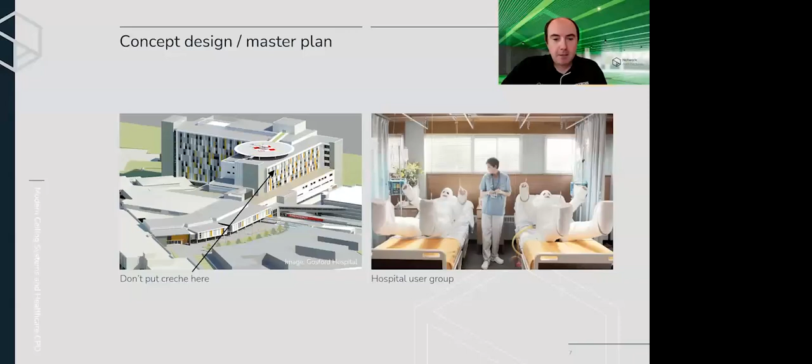The next section of the journey is the business case and project business case. This determines the scope of works and the project ceiling budget. In New South Wales, for example, the government locks in this funding over 5 years as a result of their overall clinical services plan.

So in the next 5 years in New South Wales, we've earmarked $11.9 billion for hospital projects, and this is over 130 different projects.

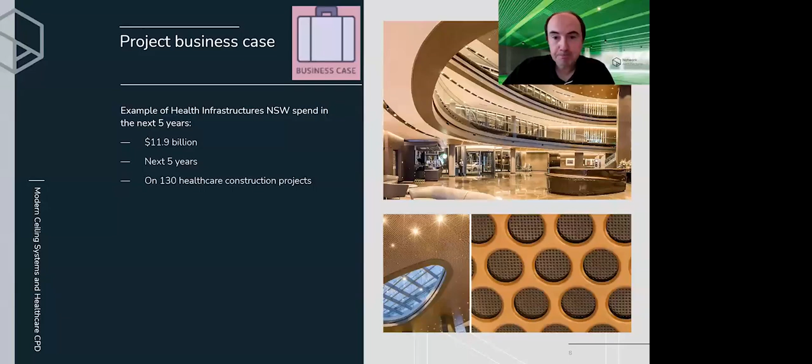What I'm trying to say is at the outset, schematic designs are very useful to have conversations with other stakeholders, like the ceilings and the mechanical guys, to try and see if there's simpler solutions. The simplest solution in this case would have just been to change the ceiling from a standard modular T-bar grid system and use a plank system to run across.

But because we didn't find out about this clash until we were actually on site in the construction phase, we didn't have the lead times to get the system manufactured and fabricated from the factory.

So I'm just going to put it out there to some people in the comments - how do you think we could rectify this situation? I'll take a moment to pause, and if you can put some ideas in the chat, we'll get back to that.

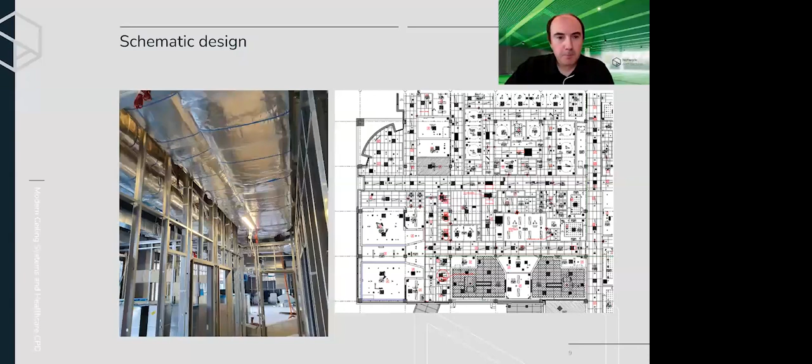The next and last phases are detailed design elements of healthcare ceilings. Colors have a massive impact on patients' well-being, and it's been noted that clear wayfinding reduces stress when you're in a hospital, and the use of colors for distraction can alter people's moods when they're not feeling great in hospital.

Traditionally, white is used for ceilings due to its light reflection and also because it shows up dirt. But that doesn't need to be the case now with modern ceilings - we can be a little bit more adventurous and use a different color palette from just white.

Now we're going to discuss the evolution of healthcare and design. There's been a great shift away from building institutional type white interiors. We now use an evidence-based design approach, which uses a scientific framework where we can measure the effects that designs have on people and the building's impact on the end user.

Scientific data shapes our style of design of future hospitals, with biophilic principles at the forefront due to the positive impact they have on building users.

We're also going to talk about new technology driving design, such as remote patient monitoring, as devices like smartwatches are managing to move people out of hospital, lessening the crowding and gathering of people, which has the effect of less spread of infection through contact and less traffic and stress on the infrastructure required. Doctors need their workplace to have superior acoustic spaces to allow telehealth sessions with remote offsite patients.

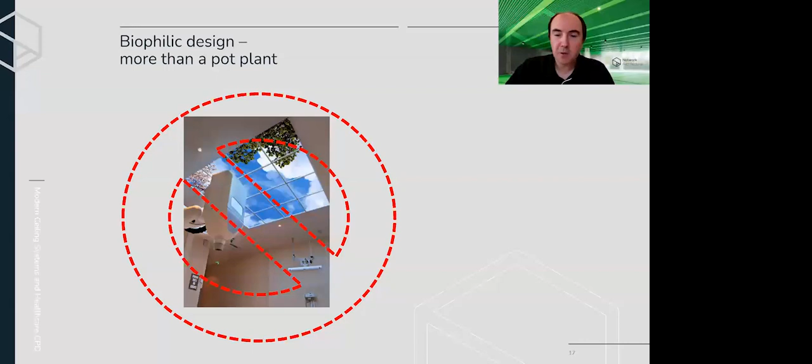Biophilic design is, as we've touched upon, the human attraction to nature. It's a concept that's been recognized for several decades by the scientific and design communities, and intuitively for hundreds of years by the population at large.

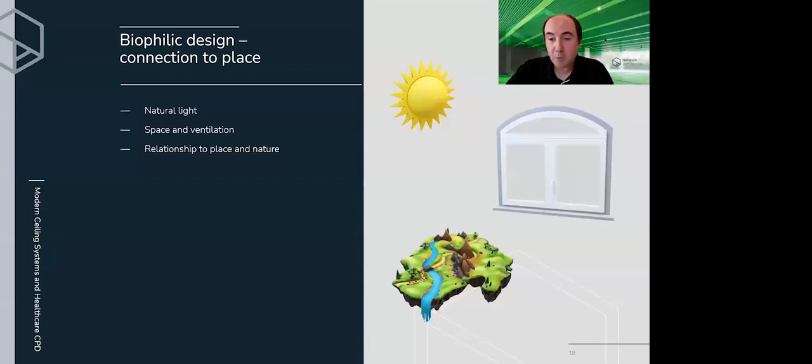Biophilic design has often been regarded as a luxury for property owners who want the best possible workplaces for their employees, or who want to showcase their efforts to be more environmentally responsible. In reality, though, improving community well-being through biophilia can impact patients' health and staff productivity, amortizing these upfront costs over the period of the building. The effects of a building are felt long after the cost is forgotten, and I think it's our responsibility as designers to promote this to building user stakeholders.

So I've got to do a case study of a project our company did in Hong Kong. This was a children's hospital, the Center of Excellence for Pediatrics for Children in Hong Kong, and it was built around some theories of biophilic design.

All patient rooms within this building have large windows with views that allow natural light and a connection to place, with views of the harbour of Kowloon. Most of the patient bedrooms have water views into the harbour. The ceilings also have 95% light reflectance to allow natural light to reverberate around the room, and these ceilings have the technical ability to be airtight. The second section of this hospital was constructed during COVID, and all of the ceilings in this hospital are airtight ceilings.

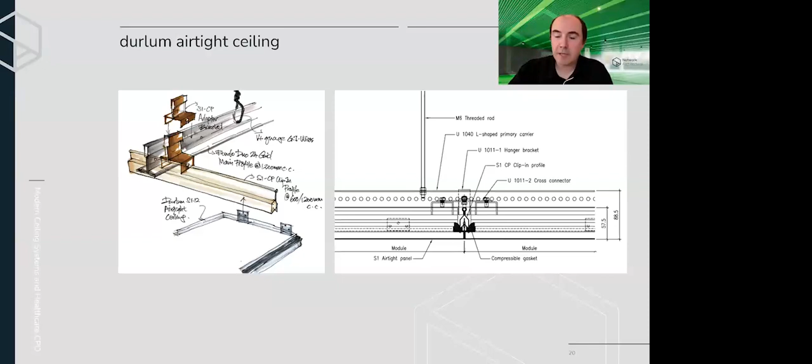Having airtight ceilings is useful for a couple of reasons. Negatively pressurized rooms is one example - we use gasket sealed ceilings there. We'd use negatively pressurized rooms for patients that need isolation, generally those with contagious diseases such as coronavirus, tuberculosis, chickenpox, and measles. Essentially what we're trying to do is keep the pathogens that the patients have within that space. We introduce air pressure into the room, and it's then extracted through filters, but it's very important that we don't allow that air to escape into the plenum space.

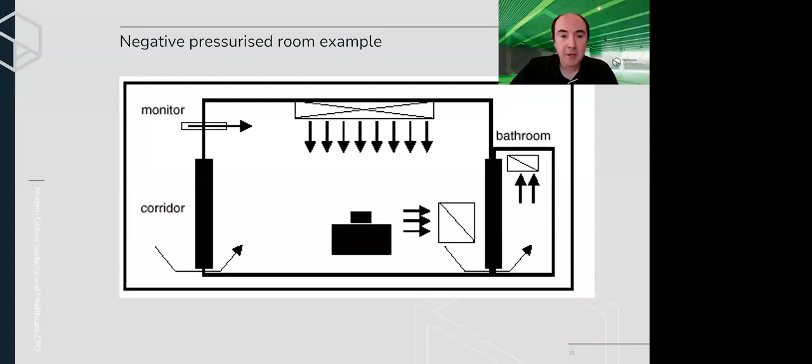The other type of room where we'd use a pressurized and sealed ceiling is positively pressurized rooms. This has a slightly different purpose - we use positively pressurized rooms where you want to keep pathogens from entering the space. That's useful for patients that are immune compromised, have just come from post-operation, or have had a treatment of chemotherapy. The idea is we put air pressure into the room, causing positive air pressure, which stops pathogens from entering the space. So we also need pressurized ceilings here.

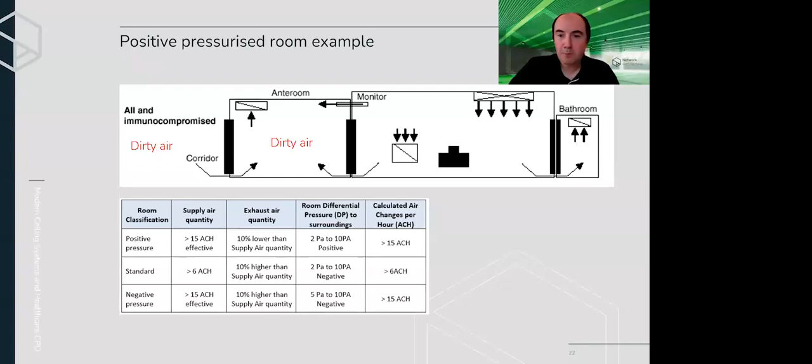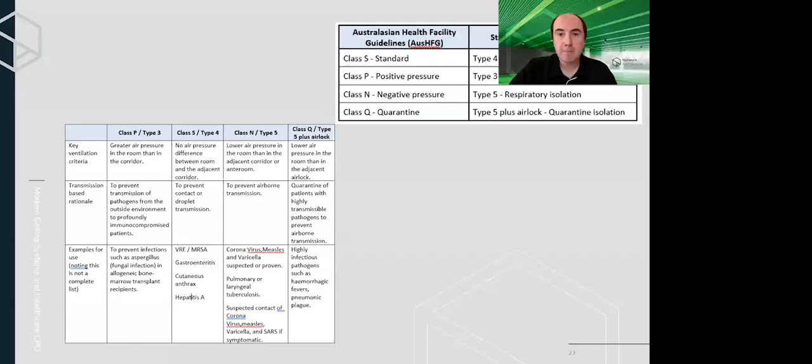There's a table called the ACH - there are tables for the amount of air changes we have per hour. This can get a bit technical, so if you have any technical questions about negative and positively pressurized rooms, please feel free to contact me afterward and we can go through it all. There are guidelines of different standards of positive and negatively pressurized rooms, classed as S, P, N, and Q, all designed for different infections and different types of diseases. Any questions on this, please get back to me.

Another case study for biophilic design was a project in Sydney, St. George Hospital. Biophilic design also has a connection with country and place. The architect designing a refurbishment of St. George Hospital wanted to connect the local river, the Georges River, into the building.

The idea was that the entranceway could have a soffit mimicking the flowing water of the Georges River. So the ceiling system we came up with was a panelized suspended exterior ceiling system made of aluminium, coated in an electroplated finish to mimic the shimmer of the water and copy the Georges River. This adds a connection to local place, from the hospital to its local environment and to country.

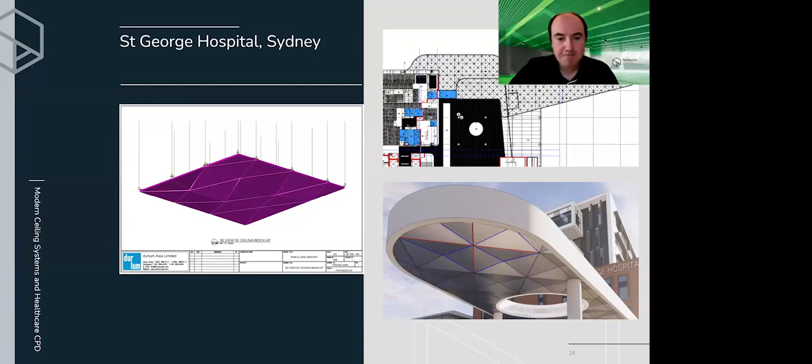Another hospital project where we're introducing biophilic design using metal products was Footscray Hospital down in Victoria. Now, we're still very much at the concept phase of this, but the idea is that we would have some curved timber battens.

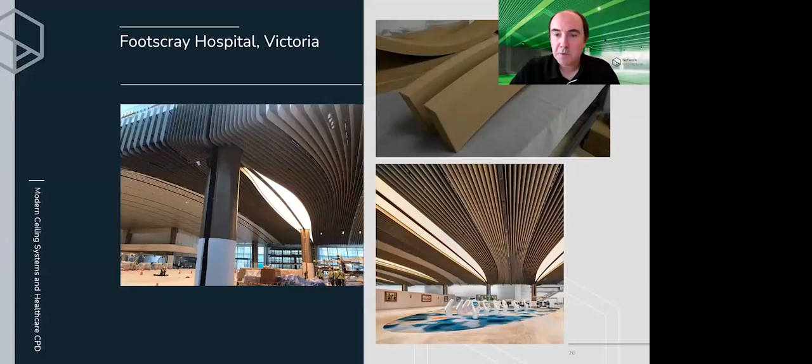Timber battens is the look the architect was going for, but they weren't happy with the maintenance schedule timber would require. So we could offer aluminium and steel solutions that mimic timber. The materiality is a little different, but we can curve the grain. Sometimes printed wood grain on metal looks fake because the grains don't marry well, but Durlum have good techniques of bending the grain to follow curves, so we get a natural look within the timber metal battens.

So we're going to recap and go over a few questions now. What type of data did Florence Nightingale use to develop her theories of nursing? Was it visual cues, statistical data, or clinical research? Bearing in mind Florence Nightingale loved mathematics, that might give you a clue.

The next question, question 4, is: can you name 3 elements of biophilic design? Thinking about biophilic design, what's the idea? There's obviously nature, light, air, those sorts of natural elements. Can you name 3 elements of biophilic design?

So the second section we're going to discuss is post-pandemic ceiling design. If COVID-19 taught us anything, it's that modern healthcare facilities need to be flexible and cope with quick changes. I'm going to do a few case studies about some international examples.

One recent example of flexible design and building was the appropriately named Nightingale hospitals built in the UK. These were emergency field hospitals, 14 of them built in total, fabricated from absolutely nothing, in some cases from zero to fully complete within 2 weeks. They were built in existing infrastructure such as conference centers, train stations, any large area that could handle multiple people, using British Army engineers to construct them.

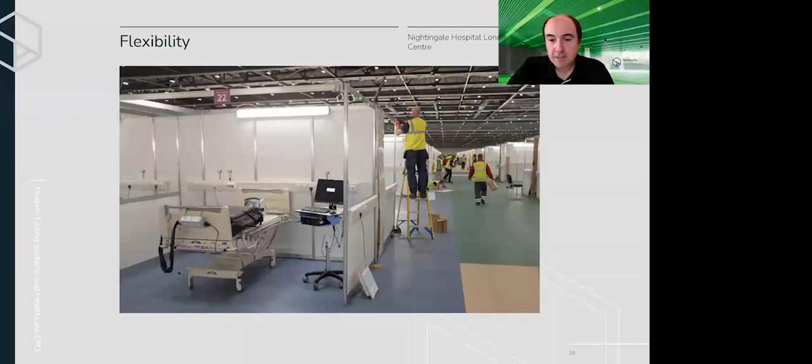This is an extreme example of necessity over design. If we look at the flow of the design, this was the ExCeL Nightingale Hospital in London, in a conference centre, so very simplistic. It had a simple design: patients come in, they're admitted, assessed, go to their bed, then once in their bed, there's a recovery area and discharge.

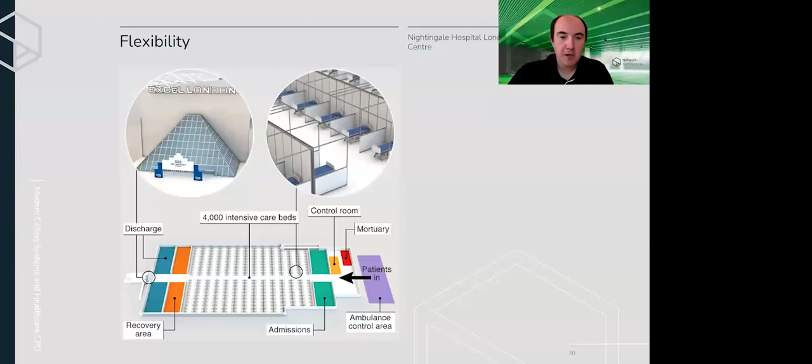Now, one particular Nightingale hospital was in Manchester, which was actually put forward for an award. It was created inside an old train station, Manchester Central Station, which was more used to hosting nightclubs, parties and events than being a hospital. But the amazing thing is it was designed by BDP architects and built by McAlpine contractors and the British Army, and they managed to construct it within 13 days.

Now, the biggest flaw of this whole system wasn't the actual buildings themselves, it was the amount of staff required to man them. So they were never actually fully operational. The British government tried to get old airline crew and hotel staff to man them because there wasn't enough medical staff, so a lot of them didn't actually see any patients. They ended up costing £500 million to construct. But it just goes to show you what can be achieved when you put your mind to it.

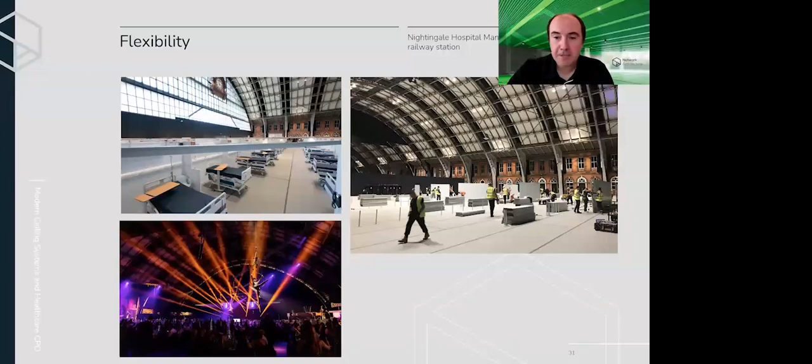One project built pre-pandemic that I'd like to highlight was designed by Architects Design Inc. This was a community-based health centre in Ballarat. Their concept was a whole-of-life design based on the benefits of interaction with nature and community, illustrating the point of multi-use spaces. In addition to a full on-site suite of doctors, dental, medical services and office facilities for over 100 staff, the centre also included a gymnasium, a cafe, conference facilities, and meeting and event spaces for the community to use. This was all designed around a central atrium using biophilic design and lots of natural light.

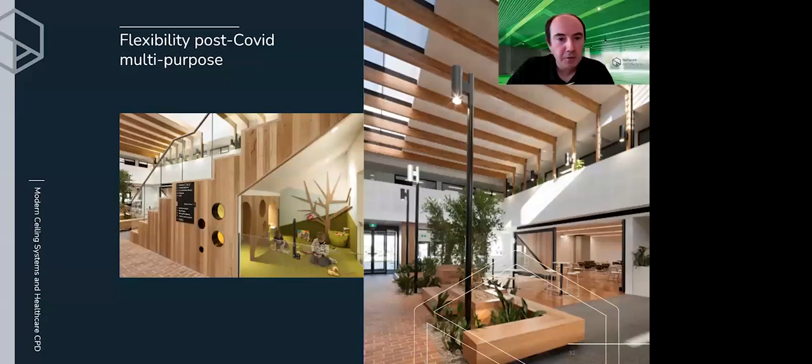So it's one case study I'd like to highlight, and also the innovative use of space by putting a kids' play area underneath the stairs. So we have a case study here of a hospital in Bavaria, in a place called Pfarrkirchen.

And this was a study we did using natural light into the hospital environment. The key findings were that light impacts human health and performance by enabling the performance of visual tasks, by controlling the body's circadian rhythm, and the actual light affects people's mood and perception.

They did actual tests on this particular hospital. Durlum managed to introduce lots of little circular light pipes within the ceiling plane of the central atrium to allow this natural light to come through into the space.

So natural light is an important factor in controlling the body's circadian rhythm, and light impacts our outcomes of healthcare settings by reducing depression amongst patients. It also decreases the length of stay that hospital patients have within hospitals, and it improves the patient's sleep patterns.

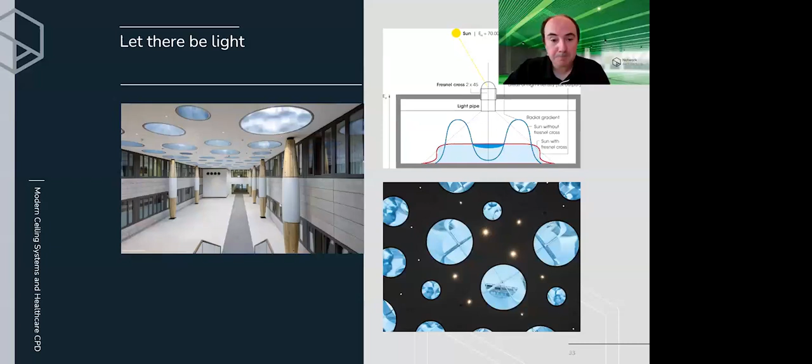Another example of how we can use natural light is this. This is actually a subway station in New York that we designed. The subway station is subterranean, underground, but we still managed to get some natural light into the platform area by building these huge light tunnels.

So the use of natural light inside buildings has many benefits that we've gone over. It lessens the agitation amongst dementia patients. It eases pain and actually reduces the amount of pain medication that patients in hospitals require.

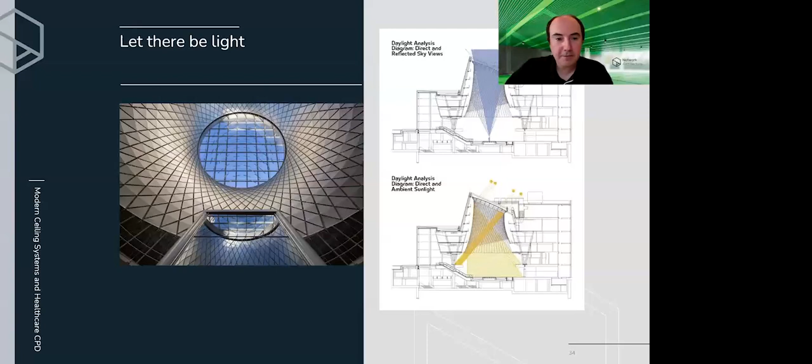One major user group that we haven't really discussed so far is the caregivers, the doctors and nurses that work in the hospitals. Natural light can also improve the adjustment to these care workers when they do night shifts. That changing of working days and nights is actually improved by tenfold by having the introduction of natural light in their working environment.

Another example of some innovative technology in ceilings that we've done to get natural light: this is actually an airport, in Singapore's Changi terminals. We have these butterfly ceilings which open and close and allow natural light at different times of the day to come into the terminal. The idea behind this was to improve passengers' jet lag and improve their circadian rhythm.

Depending on the height of the sun, we can adjust these butterfly opening ceilings and close them. We can also control the temperature of the space by increasing and reducing the amount of natural light. So at peak midday, we can close the shutters a little bit to allow a little less light in, to still allow natural light in, but also control the load of the air conditioning systems within the building.

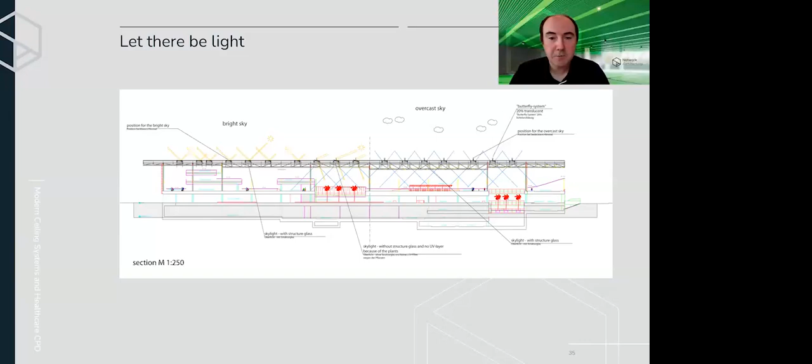Another thing we need to touch upon in healthcare environments is artificial lighting, because that's a really important part of ceiling design too. Good lighting can reduce the number of clinical errors that staff make in hospitals. Studies have shown that pharmacists make 2% fewer dispensing errors in areas that are illuminated with light above levels of 1500 lux. Also, one major important driver of lighting design in hospitals is the positioning of lights.

One major advantage of metal ceilings is that you can custom design the lights to fit completely and integrate them in with the metal ceilings.

In this slide, we're going to talk about how ceilings affect well-being. Acoustics and noise and its control impact our physiology and is one of the most critical elements where ceilings can affect our well-being. The ceiling is the best place to control this due to its large open surface area above our heads.

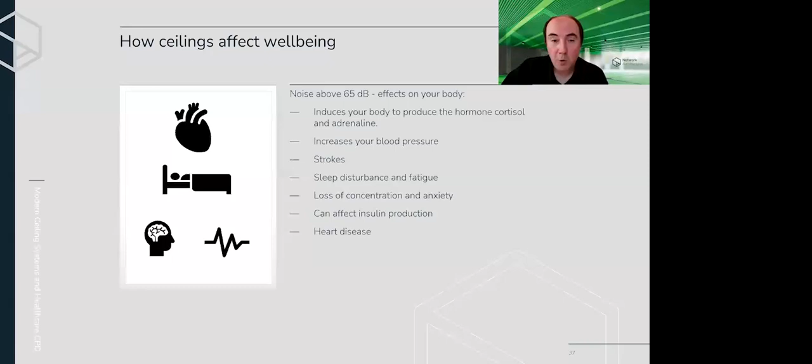The World Health Organization recommends that hospitals should have noise levels not above 35 decibels during the daytime, and hospitals in the evening should have noise levels of 30 decibels. Now, most hospitals' sound, which has been tested, the sound levels are above 60 to 70 decibels. So they're already above the recommended guidelines by about double, and all these effects of sound affect well-being. So it is really important to get the acoustics right in hospital environments.

So we're going to talk about materiality and well-being, surface hygiene and interrupting the chain of infection. Infection control in medical spaces is one of the fundamental priorities when we're designing and building a hospital, and ceilings, at the very least, should prevent pathogens from growing on the surface and actively control the stop and growth and spread of microorganisms such as bacteria, fungi, and yeast. By stopping these organisms on the surface of the ceiling, you prevent these from getting airborne and infecting other parts of the ceiling and building. So it's very important when we're specifying products to make sure that the products don't aid the spread of infection.

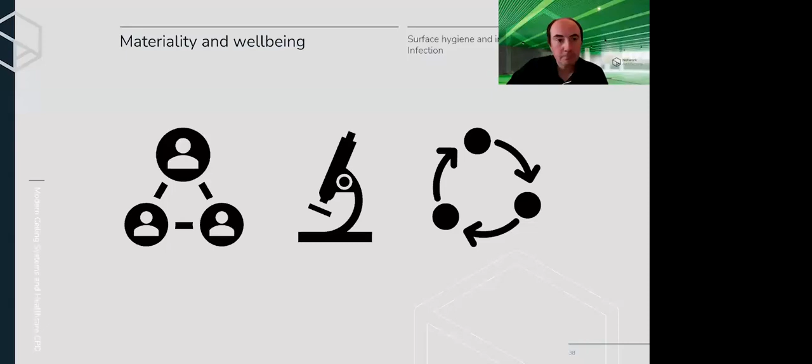So this next section, we're going to talk about materiality and modern ceiling solutions for healthcare and understanding the different types of ceiling solutions that are out there. We're going to look at their advantages and disadvantages, their life cycle costs, the recyclability of each product, and their environmental impacts, which each product has.

So the first type of material we're going to talk about is metal ceilings, mostly steel and aluminium. The biggest advantage of using a metal ceiling system is that they're generally moisture and mold resistant and antibacterial in nature, due to the fact that there's absolutely zero nutrients on the surface of a metal ceiling that bacteria can thrive off of. And also viruses as well have nothing to replicate on the surface of a metal ceiling.

Metal ceilings are also really good at acoustic absorption. With some insulation behind, you can achieve the highest sort of acoustic absorption possible, like a 1 NRC. And another thing about metal ceilings is that they have a massive lifespan. You can actually get a good 20 to 30 years of lifespan, and the ceilings still look as good 30 years down the track than the day they were installed if they're maintained.

And when we're talking about the lifespan of a ceiling, when you look at the fact that you do get 30 years use out of it, you actually save an average 47% over the life cycle of using a metal ceiling over other materials that will need to be replaced many times in that 30-year period.

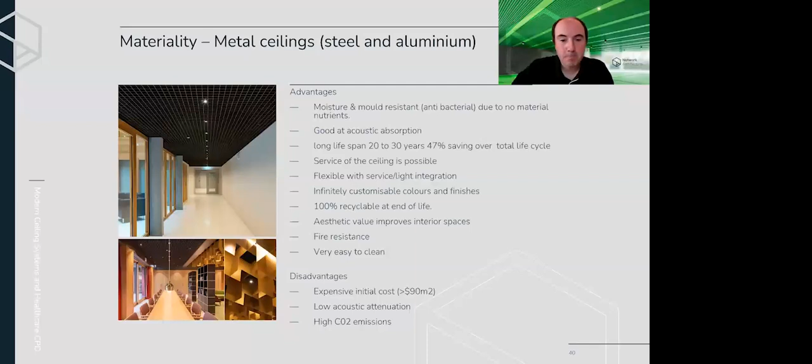So the next product that we're going to discuss in healthcare environments is mineral fiber ceilings. The biggest advantage that mineral fiber has is its low initial cost per square meter.

It's a relatively cheap initial outlay of $40 a square meter for a high-end ceiling tile. Within mineral fiber, you get a good balance of acoustic absorption and attenuation. Mineral fiber ceilings are pretty cheap and easy to install and replace. If there's a damaged tile, you just need to pop one out and pop one back in.

They're also really easy to access for plenum spaces. In those previous slides where we showed you all those services running in the plenum space, mineral fiber tiles are really easy to remove. You just pop up the tile, drop it down, and you get access to the plenum space above the ceiling tile.

Recycling is possible for mineral fiber, but it's a bit of a process. The main component of mineral fiber is clay and mineral wool, which acts as reinforcing to give the panel its structure. So mineral fiber ceiling tiles can either be recycled into other mineral fiber ceiling tiles, or recycled into bricks due to their high clay component.

One good thing about mineral fiber is that because it's clay, it has a high fire resistance, and it achieves its Group 1 rating. Mineral fiber ceilings are capable of being waterproof and achieving an RH 100 - that stands for relative humidity 100, so 100% waterproof. And cleaning is possible on some ceiling tiles.

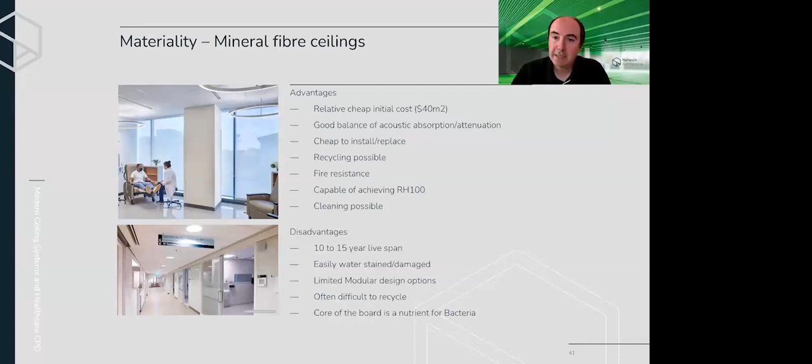One major red flag for mineral fiber in use in hospitals is that the core of the board is actually a very good nutrient for bacteria. As I said before, we use cornstarch, which is a form of simple carbohydrate and sugar, and that acts as the binding agent for the core of the board as the adhesive. A benefit of that is it's quite an environmentally friendly way to manufacture adhesive - it's low impact on the planet, but it is a nutrient for bacteria. So all mineral fiber boards put in hospitals should have an antibacterial coating placed on the surface to inhibit bacteria getting into the core of the panel.

The next material we're going to talk about is glass and rock wool. They have a couple of advantages as well: they're fire resistant, they have very high levels of acoustic absorption, sort of 0.8 up to 1, and they are moisture resistant. Pretty much all glass and rock wool ceiling tiles have an RH rating of 100 and are hydrophobic. What that means is that when a water droplet lands on the panel, it beads away and is not absorbed by the core of the board like a mineral fiber ceiling tile would.

Generally, rock wool ceiling tiles are composed of 75% recycled material, and a major benefit is the core of these boards has zero nutrients for bacteria. So even if bacteria do get into the core of the board, they won't multiply and spread.

They're also very easy to clean because of that hydrophobic nature. Dirt and water tends to bead off it, so they can be wiped clean and reinstalled back into the ceiling grid.

Now, one of the major disadvantages of these ceilings is their inflexible design options. They tend to be modular only, so we have that issue with just designing white squares and rectangles. They're slightly cheaper than a metal ceiling but more expensive than a mineral fiber ceiling for the same aesthetic. You'd be looking at roughly $60 a square meter to supply a high-end rockwool ceiling tile.

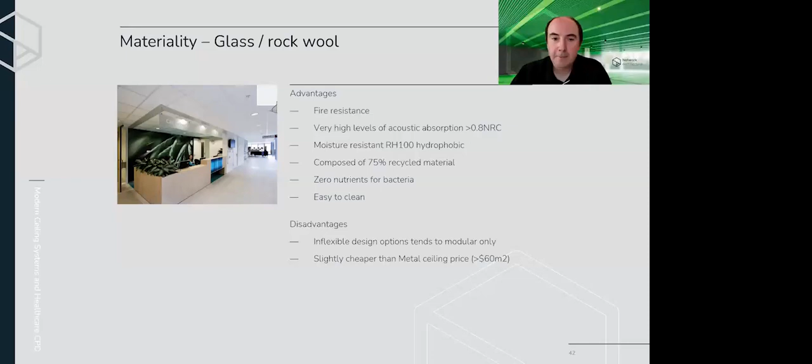Now, the next material we're going to discuss is monolithic acoustic board. This is actually large format sheets of mineral fiber, coated with a fleece and screw fixed onto furring channels, just like standard plasterboard would be. But they're topped with an acoustically transparent layer of screed to allow the acoustic absorption.

So what that means is we get a flat monolithic look, just like a flush set plasterboard ceiling, but we have all the acoustic advantages of mineral fiber. We can get very high acoustic absorption using these types of ceilings, upwards of 0.8 NRC, and we have attenuation of about 35 CAC and up.

And as I say, no visible ceiling joints aids infection control because there's nowhere for dust, dirt, and bacteria to join. And it's a great aesthetic because it's a flush set look. So very good for hygiene control and aesthetics.

Now, the major disadvantage of this particular product is it's expensive. It's $230 for material costs straight off the bat. But you will get sort of 10 to 20 year life expectancy out of this.

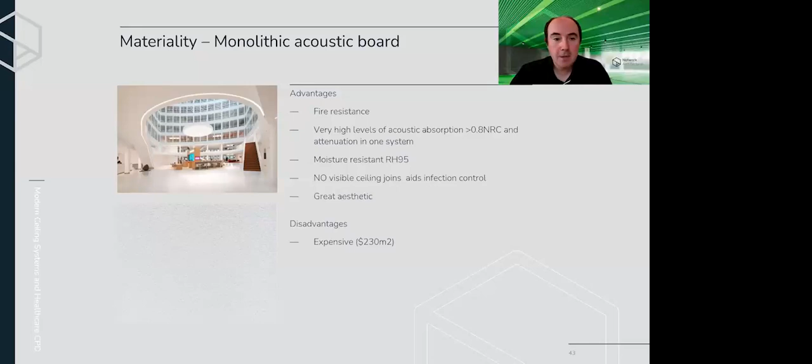We're going to go on to our next questions, our last 2 questions. So what is the percentage of cost saving you can get by using a metal ceiling system over the other materials we've discussed here over a 20-year time span? The options are 95% saving, a 20% saving, or a 47% saving. So just have a little chance to think about that.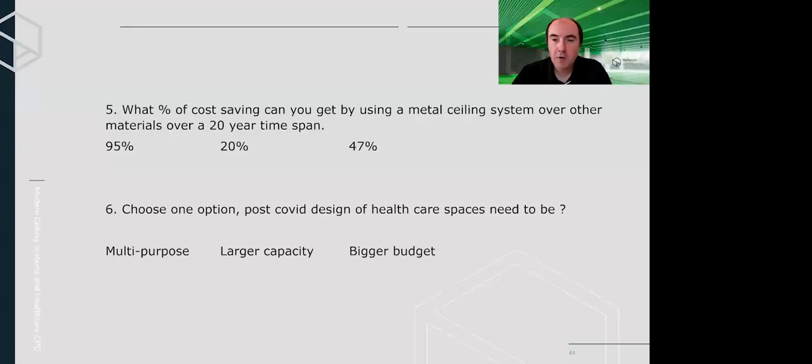And the last question is choose one option. Post-COVID design of healthcare spaces needs to be which? Multi-purpose, larger in capacity, or have bigger budgets? So what do you think, after the slides you've seen, what do you think would be the best way to design future healthcare environments? Would they be multi-purpose, have larger capacity, or need a bigger budget? So have a think about that.